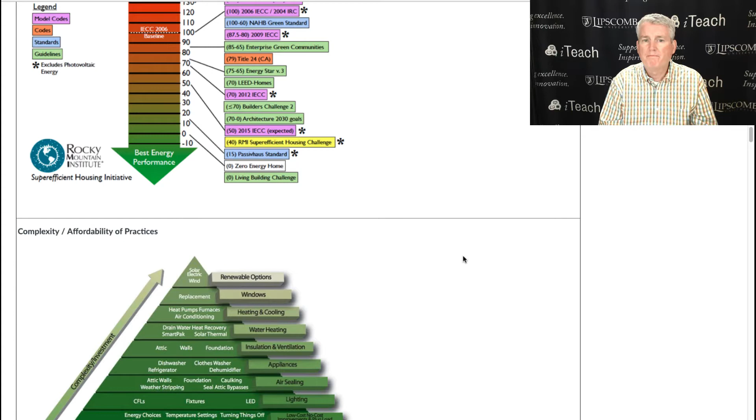The complexity affordability of practices diagram simply means that some sustainable practices are more expensive and harder to execute, harder to get installed in your green building or on your sustainable site. Notice we have entry-level sustainability at the bottom of the pyramid, and advanced sustainability towards the top. So energy systems tend to be towards the top, and complex building components tend to be towards the top.

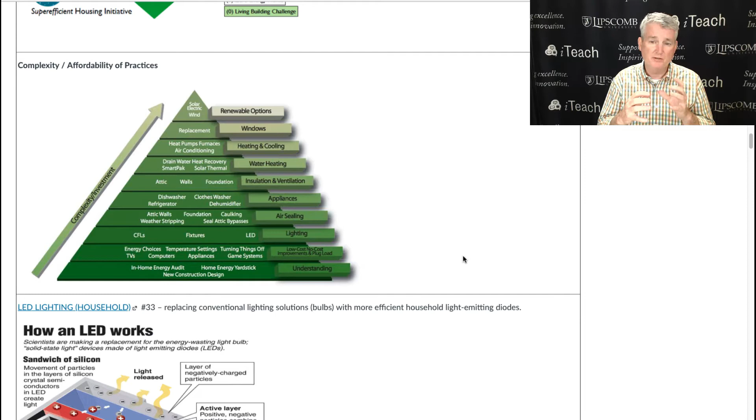Windows are probably up there because they can get really expensive real fast, particularly the triple pane argon-filled gas windows. But there's a lot you can do at the lower level in terms of energy efficiency, understanding how much energy you use, and then working your way up to components.

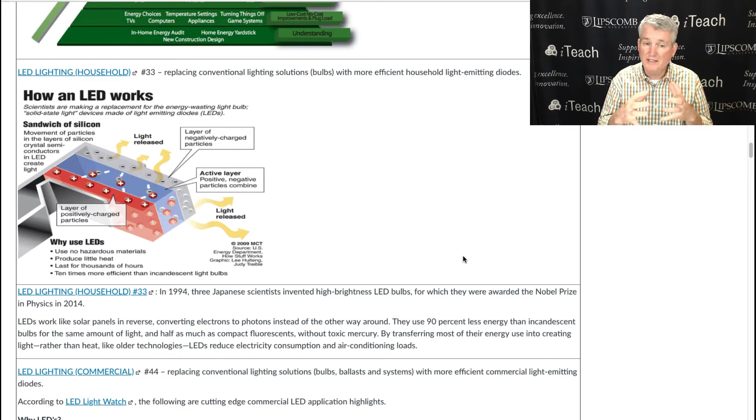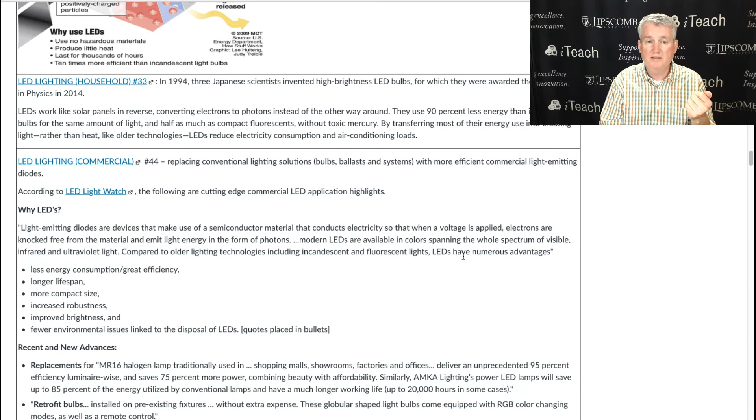LED light bulbs are just the future. Maybe there's something else that's coming along. The thing that's fascinating about how these work is that they kind of work in reverse of the way solar PV works. Photons are absorbed, light particles are absorbed by solar panels, and then they fill gaps in these chemically doped materials, and that excites electrons. When electrons move, it creates electric current. The opposite occurs in the case of LED light - photons are released, which is really fascinating in terms of how they've done that. So LED lighting in households and in commercial buildings are in the top 50 of the most impactful sustainability practices for energy efficiency in green buildings.

Here's some great information on some recent advances as well. Living machines basically mean we're integrating wetlands and water treatment systems and aeration systems in buildings, adjacent to buildings, through buildings, and so forth. So some of these systems actually even use tidal wetlands to clean water.

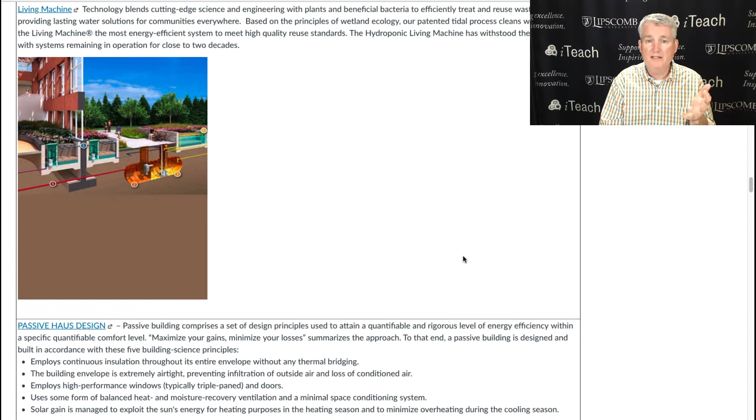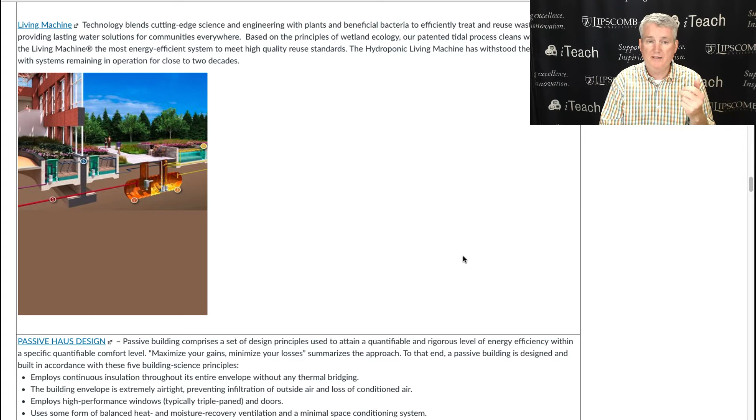I had a chance to stay in a hotel called El Monte Sagrado in Taos, New Mexico, that had a living machine in it, and it was designed by the Earthship architect, who's known for his very earthy designs.

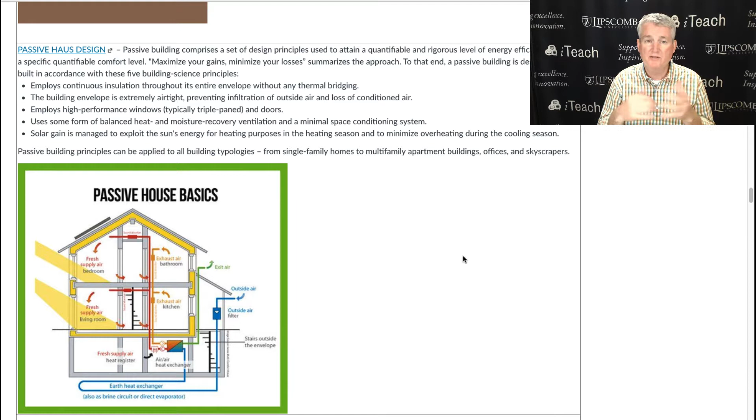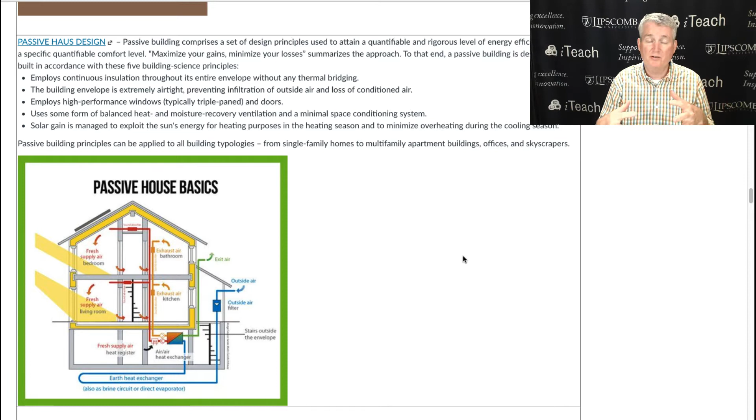Passive house design is the future in terms of super efficient housing. You could call adobe construction, in Mexico and the Southwest United States, a type of passive house design. They're basically using thermal mass to hold energy in, to hold heat in, or hold cool air in. After they open all their doors and windows at night to let the cool air in, they shut all the doors and windows during the day, and they hold it in there with that mass of the house.

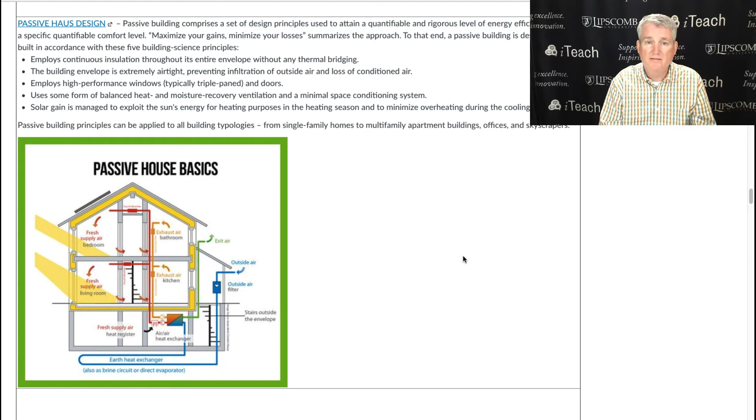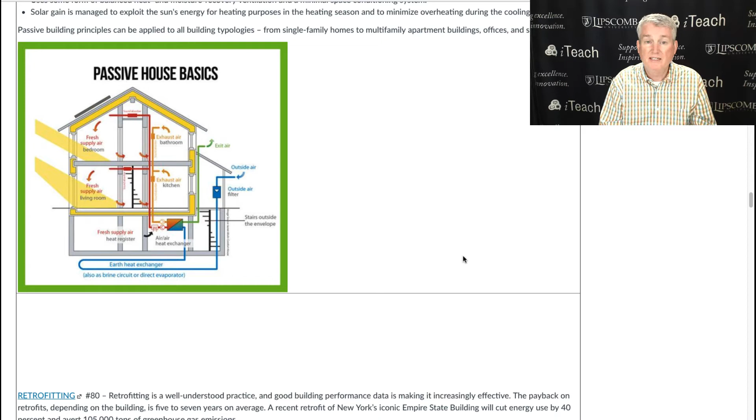But air exchange is pretty critical in modern construction buildings, or the air gets kind of sloppy. The Germans came up with this technology, and it is radically effective - it's just very intensely insulated in terms of their function.

Of course, retrofitting - it's always better to recycle a building or a site. Rooftop solar generation, we've talked about in terms of energy, but this one is interesting because it's on a LEED Platinum building built in 1888 in Knoxville. I had a chance to film that while I was up there recently.

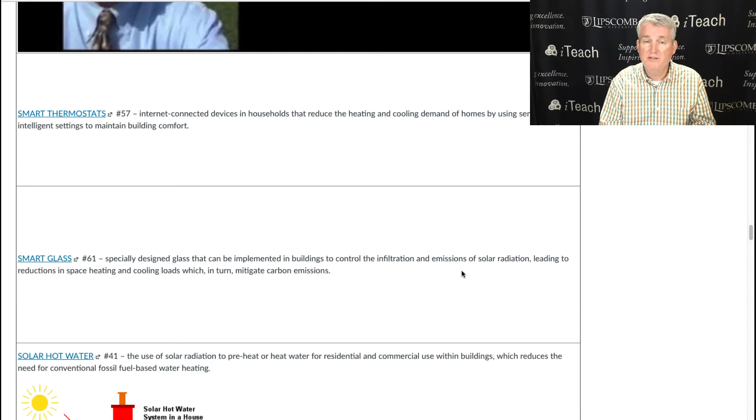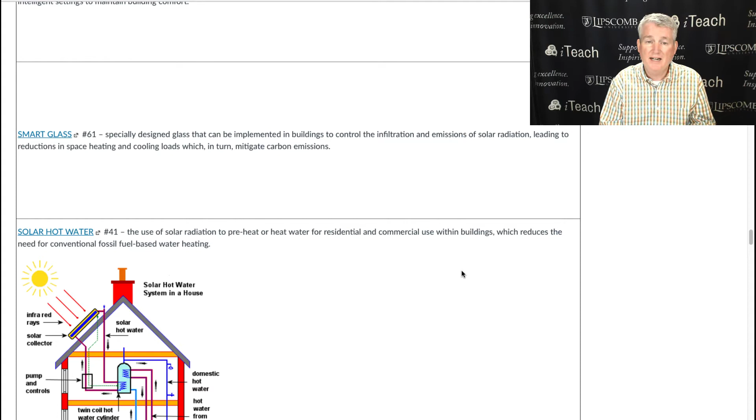Smart thermostats are the building automated energy management systems of the future for our residences. Smart glass is all about managing thermal energy - if we're going to have windows, we need to be able to let light in without letting heat in. Of course, solar hot water - this is just a diagram that helps you understand how it integrates with the house.

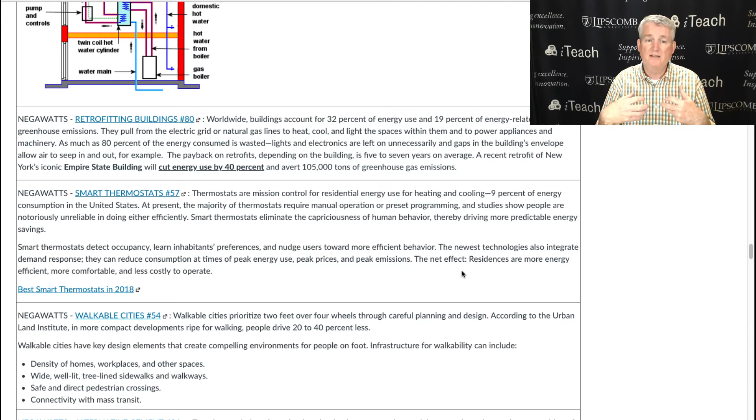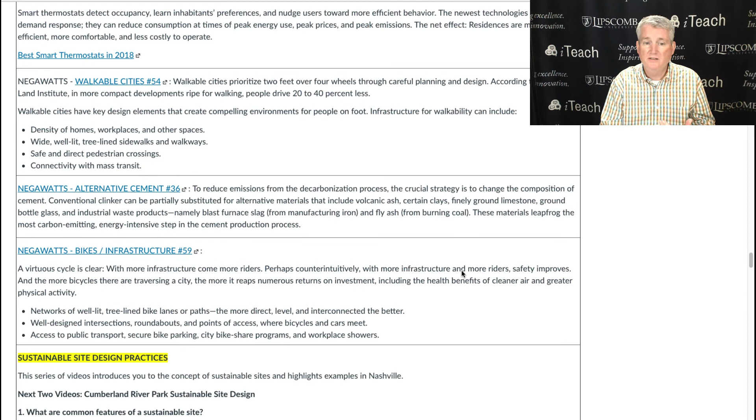I like to emphasize negawatts. Negawatts basically mean that if you can avoid using energy, energy avoided is better than energy generated, no matter what the source is. So smart thermostats fall in this category: retrofitting, walkable cities, alternative cement, bike infrastructure. Copenhagen, for example - the citizens in that country, 50% bike to work. Pretty large city.

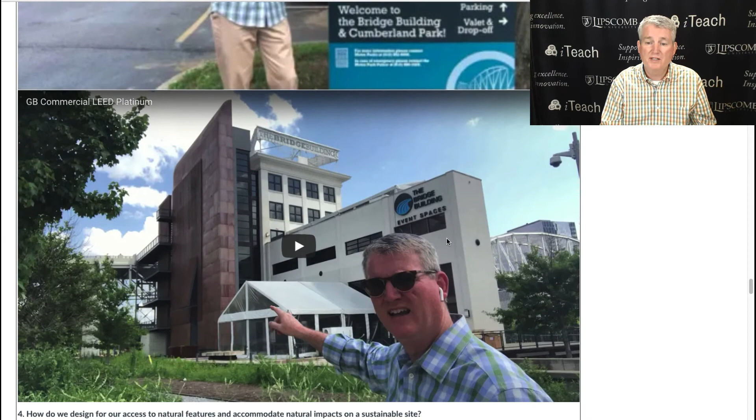Sustainable site design practices are addressed in a variety of sites around Nashville, and I ask some questions before each of these videos so you can understand the kind of answers that I'm giving you. I think it helps the lecture material come alive, all the way down to engineered practices as well as natural practices, and sustainable campuses. Nashville's done a great job of setting a model example for sustainability.

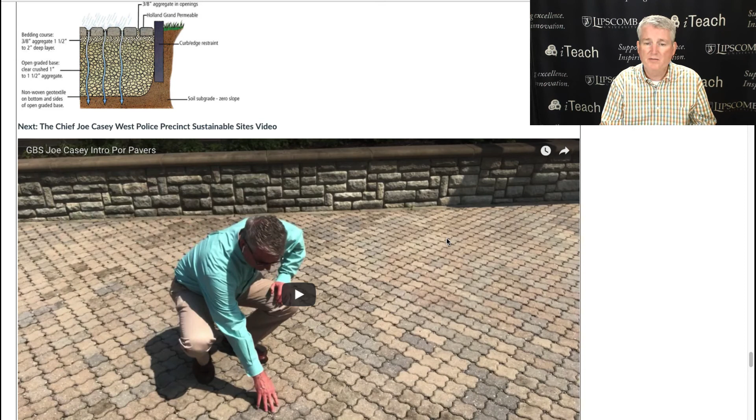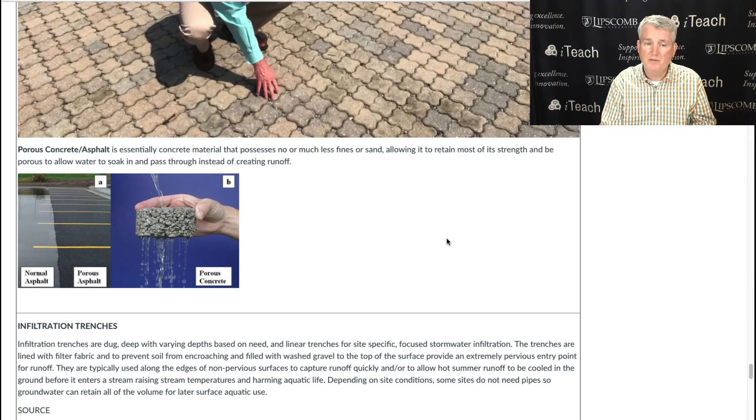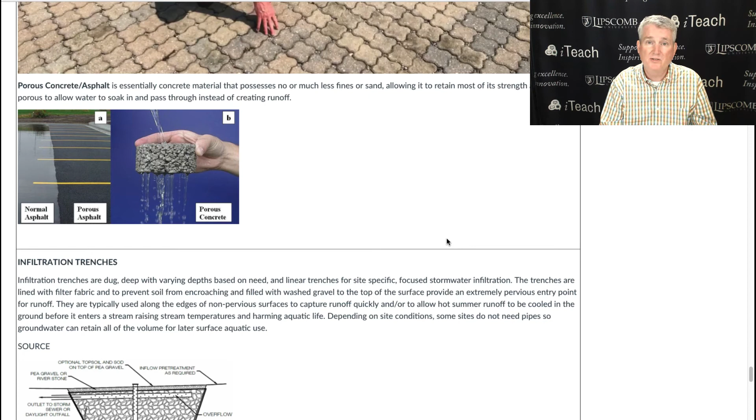Porous and pervious paving - generally there's two types. Precast pavers allow water to go around them into a deep, 1.5 foot deep subgrade of gravel underneath, like I'm talking about here in this video, or porous concrete, which is essentially just a paving material. Asphalt can be used this way too, not terribly successful, but you can see water just goes straight through it. I tend to like the porous pavers best - I've seen these systems last 20 years. You get varying degrees of quality of installation with porous concrete and porous asphalt. It's got a ways to go.

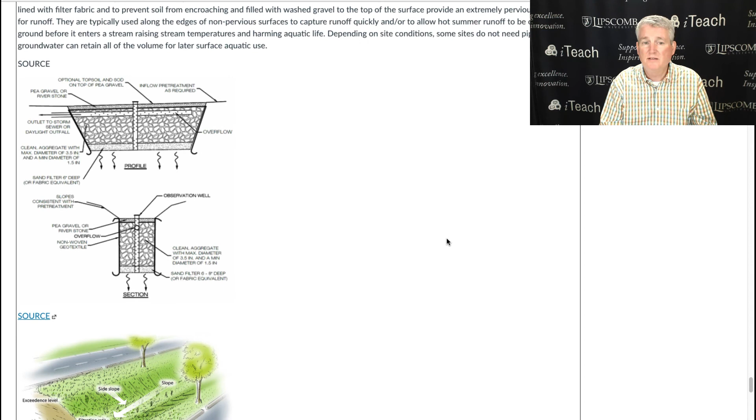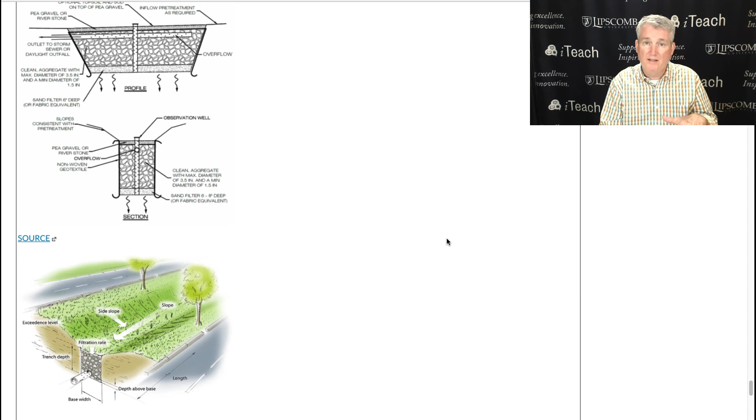Infiltration trenches are great ways of getting water in the ground in urban environments. The pipes are primarily designed to see how they're working, how full they are. You don't really want a pipe carrying water away. And if you do put a pipe in there, you want it higher than the water table so water can get to the water table, and when it gets super saturated, it can help get some of that water out of the way to keep from killing vegetation like grass lawns.

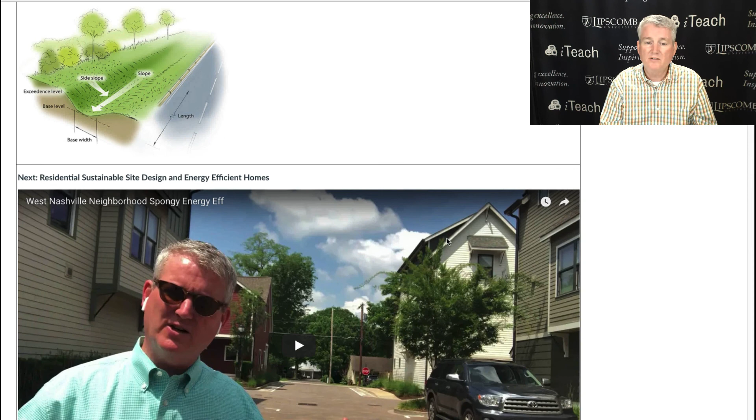Here's some examples of porous surfaces around some public buildings in Nashville, LEED certified public buildings, and living fences and living walls. I also highlight spongy neighborhoods that are energy efficient, linear, sustainably designed streetscape urban developments, which are becoming very trendy in Nashville, and a little bit about water saving devices.

These are highlights of green buildings and sites. I hope you enjoyed, and we'll see you in the next section.